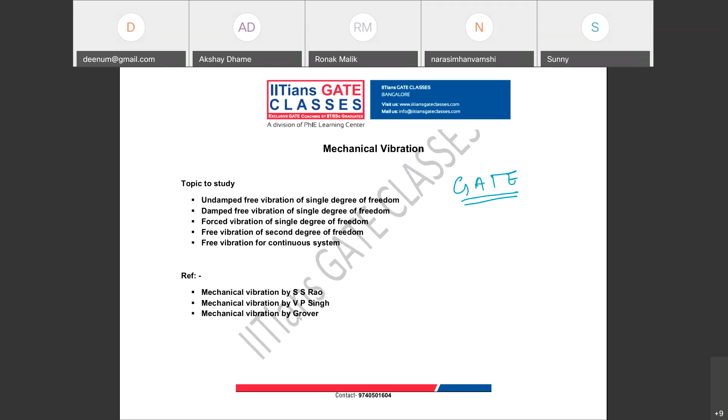So in GATE Aerospace, if you see the syllabus part for mechanical vibration, we have undamped free vibration of single degree of freedom, damped free vibration of single degree of freedom, forced vibration for single degree of freedom, free vibration for second degree of freedom, and free vibration of continuous system. These are the two extra topics we have in GATE AE paper that are not there in GATE ME or GATE XE paper.

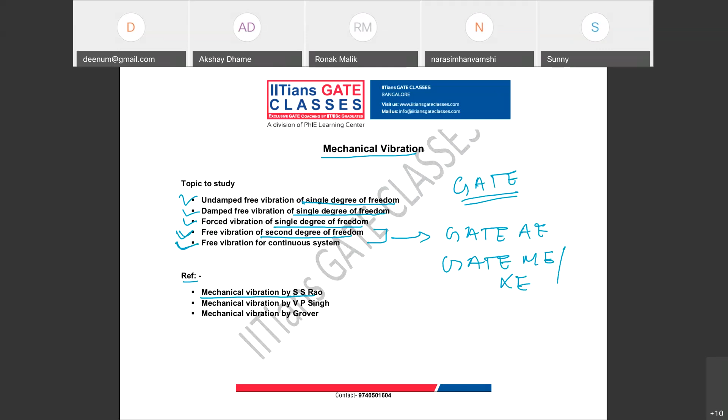So these are the additional topics we have to study. Now, the references we follow for mechanical vibrations: Mechanical Vibration by S.S. Rao, which is one of the most standard books. He is of Indian origin but is a US based author. We also follow Mechanical Vibration by V.P. Singh or Mechanical Vibration by Grover. If you want to have the basic understanding of vibration, you can always refer to these books.

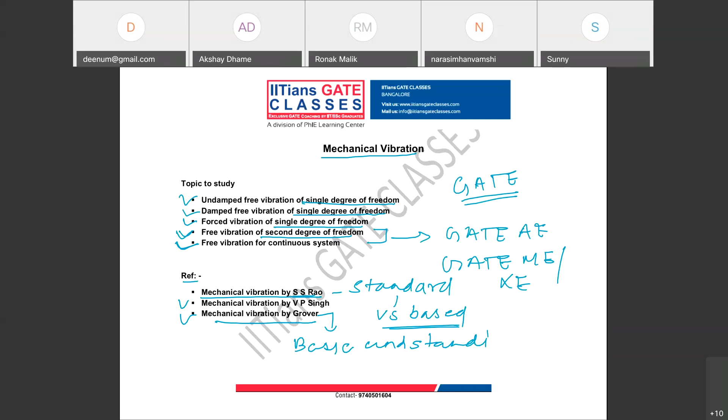Now, what do you guys mean by vibration? Here we will discuss a brief about fundamentals of vibration. So what do you guys mean by vibration? We want all classes to be interactive, so you guys can either respond in the chat box or speak over audio. Classes will be kept very simple, whiteboard teaching or teaching through PPT template.

Now what do you guys mean by vibration? If you have any motion about a mean line, like to and fro motion about this line, what is that? It's a vibratory motion. This is my mean line, and the motion of an object going in this direction, coming back, then going in the opposite direction, coming back to mean position - this to and fro motion is basically your vibration, or vibratory motion.

Now this to and fro motion you can understand by the simple example of swinging of a pendulum. You guys have done some experiment in your physics, right, using one pendulum? So this pendulum is having motion about this midline like this. So this to and fro motion is what?

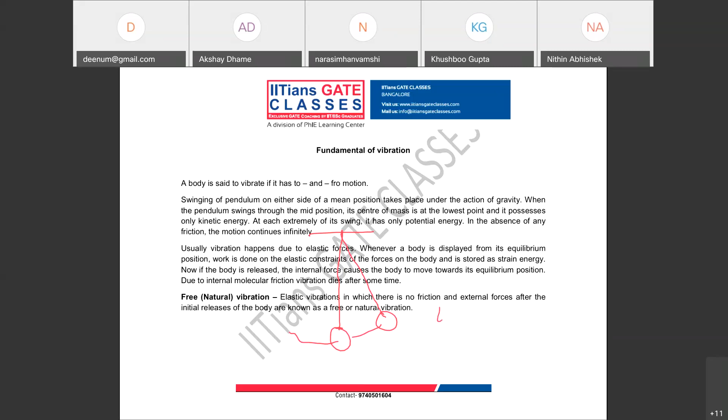Suppose you take the case of a pendulum again - we take a pendulum, and from the mean position, you pull it and then make it free to move. So this pendulum will do to and fro motion. This is known as free vibration. Once you pull it and then release it to have motion, that is free vibration. So, the elastic vibration in which there is no friction or external force after initial release of the body is known as free or natural vibration.

Vibration that occurs naturally is free vibration. Now guys, in free vibration, will your response be a function of time or not? Someone says independent, but no, in free vibration also, your response will be time dependent. Your response will be time dependent because the motion is dynamic. Whenever motion is dynamic, your response will also be time dependent.

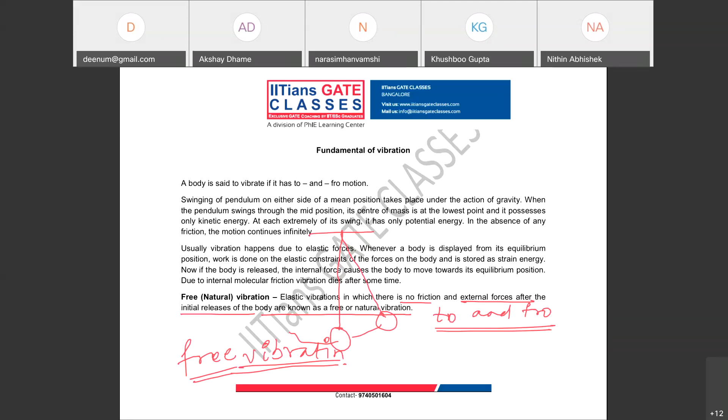Now, what is damped vibration? Anyone? These are the basics of vibration we are discussing. So, free vibration - what is damped vibration?

You guys have seen your door at home. Doors have some dampers, right? So why do we use the damper? To damp the motion, right? When you pull and push, your door needs to get stopped, so the motion has to be died out. Is it clear? In many places, like your landing gear, there also you use damping. Or if you take any other mechanical system, many places damping is required. Why? If you want to stop your vibratory motion, you need to have damping.

Damping can be many types - it can be environmental damping, structural damping, viscous damping, or Coulomb's damping, like damping due to friction. So damped vibration means when the energy of the vibrating system is gradually dissipated by friction or any resistance, the vibration is said to be damped vibration, and the vibration gradually decays until the system rests in its equilibrium position. So clear? This damped free vibration is very important for your GATE exam.

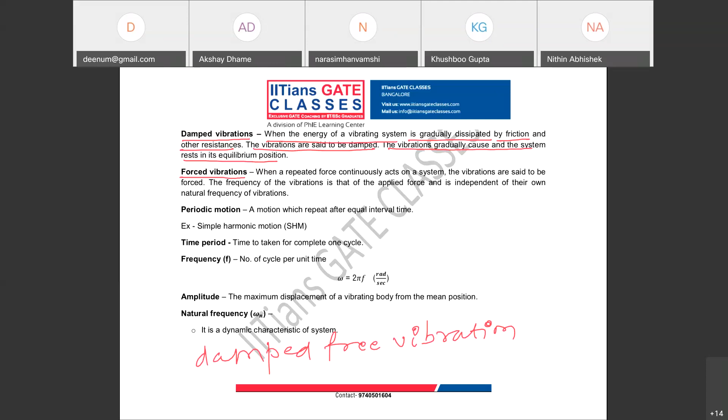So where do you see this kind of forced vibration? You guys are aero guys, right? Can anyone give an example? You guys see your aircraft engine - there are many components attached to it. An engine is one of the mechanical systems which vibrates heavily, right? A lot of vibration happens in the engine, and that vibration will be transmitted to supporting and attached components, so those attached components will undergo forced vibration.

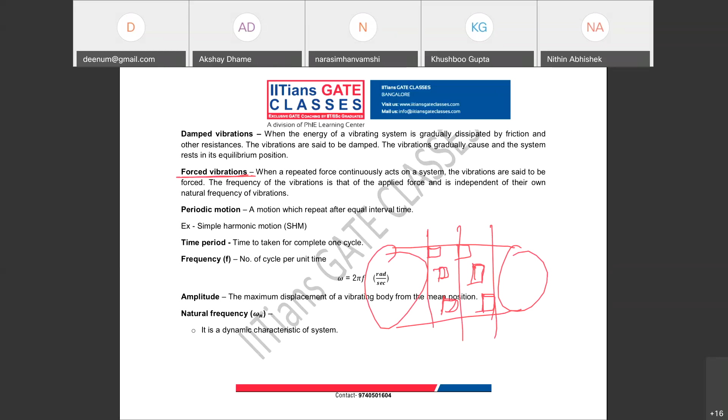Clear? At different sections of your engine, there will be different RPM, so there will be different excitation frequencies. This forced vibration is also very important in practical cases or practical design of components, because in your engine, many components will be attached.

Specifically, have you guys heard about aircraft systems? So all the systems will be attached to your engine, and mostly aircraft systems are tubes - there will be many tubes in aircraft systems. You have fuel system, hydraulic system, air system, many systems, right? So those tubes will be highly prone to undergo forced vibration, or there's the gear system, or any other thing attached to your engine.

And those components have less mass, so mass is less. So what will happen? When you have less mass, your inertia is less, right? Then that component will vibrate easily. Am I correct? So with less excitation also, it will start vibrating.

And then what do we usually try to do? What is resonance? Anyone heard about resonance in vibration? It's when the natural frequency of the system becomes equal to the excitation frequency.

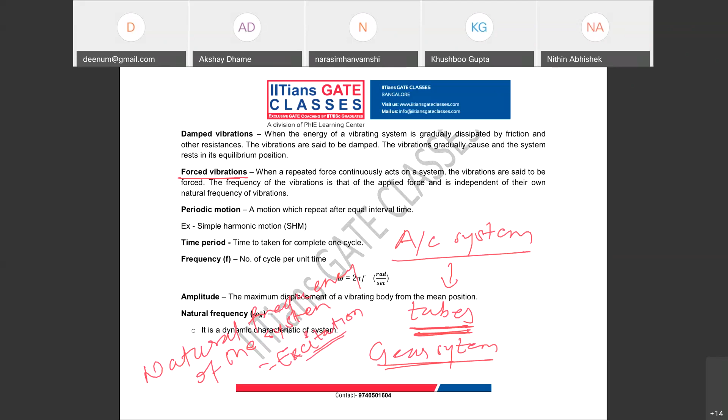Have you guys heard about one bridge? Right? What is the excitation? It's a forced vibration. What is the meaning of excitation? The English meaning, something is exciting. So in forced vibration, we call the frequency as excitation frequency, which is causing the forced vibration.

Now guys, next thing, in basics, what we will study is forced vibration. When we go to the forced vibration part, what is periodic motion? Simple term, you guys know what is periodic motion? A motion which repeats after equal intervals of time is periodic motion. An example is simple harmonic motion. What is the time period, anyone?

Time taken to complete one cycle of vibration is time period. What is the frequency, guys? Which is very important. The number per second, sir. Yeah, number of cycles per unit time is your frequency.

Now guys, what is this F and omega? See, omega is known as natural frequency, and this is also natural frequency. This omega n is natural frequency. So what is the difference between omega n and Fn? We know always omega is 2 pi into F. So there is only a difference of unit. If your natural frequency is given in terms of omega, then the unit will be radian per second. If it is given as Fn, then the unit will be hertz.

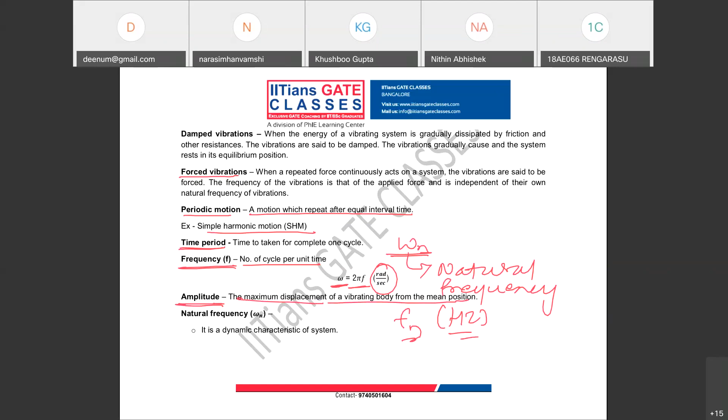Now the next thing I was discussing is natural frequency. So what is the dynamic characteristic of a system? Anyone? Natural frequency is known as... there is no theoretical difference as such. It is like you denote it, the number of cycles per unit time is Fn, in hertz. And if you want to write in terms of omega, it is 2 pi into F.

Now natural frequency, basically, is known as the dynamic characteristic of the system. Any system you design, you need to know the natural frequency. Anyone, why do we want to know natural frequency for any system which we design? Any reason to find natural frequency for a designed system? When you design a system, you need to know it to avoid resonance.

To avoid resonance. That means that system will be attached to some component which may provide something, so that there will be no resonance. We want to avoid resonance. If resonance happens, failure will happen.

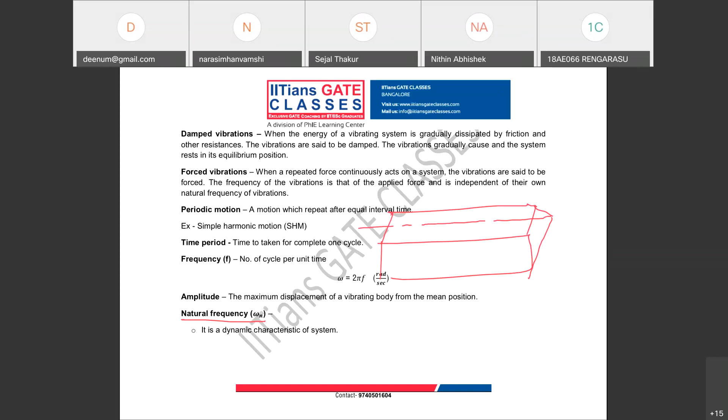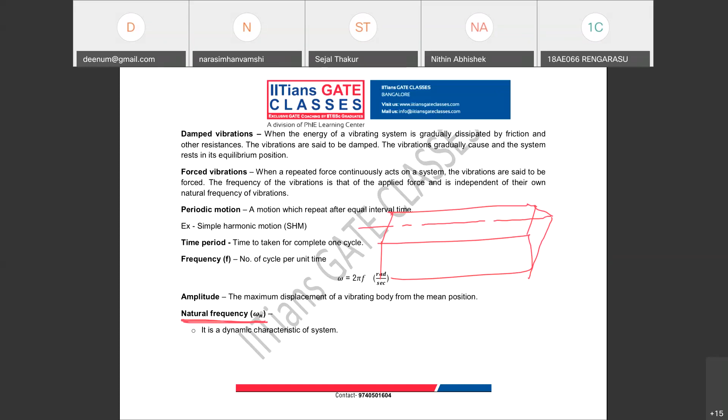So natural frequency is a very important thing everywhere. Wherever you design a system, first thing in dynamics, what we find is the natural frequency of the system. So it is also known as the dynamic characteristic of the system.

And your natural frequency is independent of load. Whatever load you apply, your natural frequency will not change. Once you decide or design a system, your natural frequency becomes fixed. So it is independent of load. Why do we multiply by 2 pi f? This is omega n, and it is 2 pi f. So 2 pi is more related with a cycle - it is something related with a complete cycle of motion.

Now, already we have discussed that this is the frequency of free vibration - natural frequency is the frequency of free vibration. And resonance we have already talked about. So what is resonance? When the frequency of the system becomes equal to the natural frequency of the system, resonance happens and the amplitude of vibration becomes excessive, so your system will get collapsed.

Now damping - already we have discussed damped vibration. So damping is the resistance to the motion of a vibrating system, that is damping.

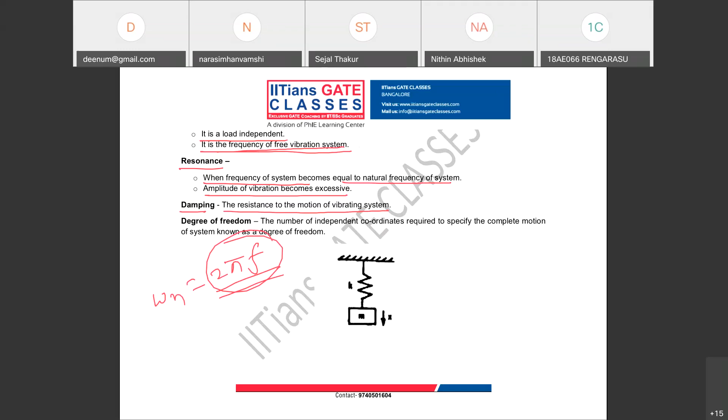Now, the next thing after this is degree of freedom. So what is the degree of freedom, anyone? What is the degree of freedom? Ability to move. It is the ability to move. Rotation around the independent axis. The rotation around the independent axis is degrees of freedom.

Yeah, so degrees of freedom is basically the number of independent displacements required to specify the complete motion of the system - the number of independent... one moment guys, yeah.

So what is this degree of freedom? The number of independent coordinates required to specify complete motion of the system is the degree of freedom.

So what I mean, see, this is a spring mass system, a single spring mass system. Now if you want to specify this complete motion, how many independent displacements are required? One. So here the degrees of freedom will be 1 in this case.

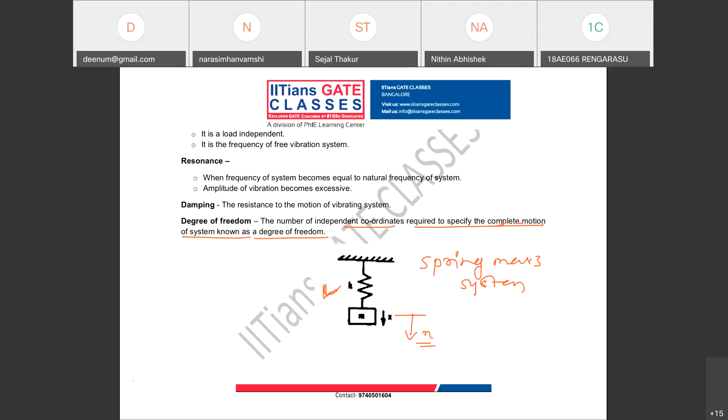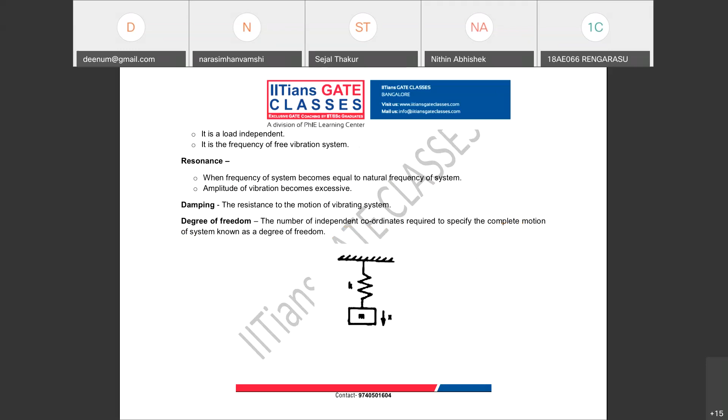Now next, once you have a multi degrees of freedom system, what is the continuous system? There are questions in GATE on this. What is the continuous system, guys? If the number of degrees of freedom is infinite, the system is said to be a continuous system.

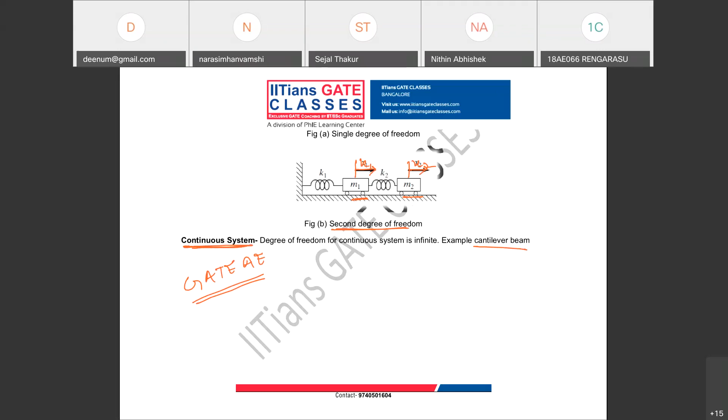What is the example? Cantilever beam. For a beam, the number of degrees of freedom is infinite. Why infinite? You can see there are many sections, many nodes, infinite number of small masses. So there will be infinite degrees of freedom associated to each distributed mass. So this is the continuous system.

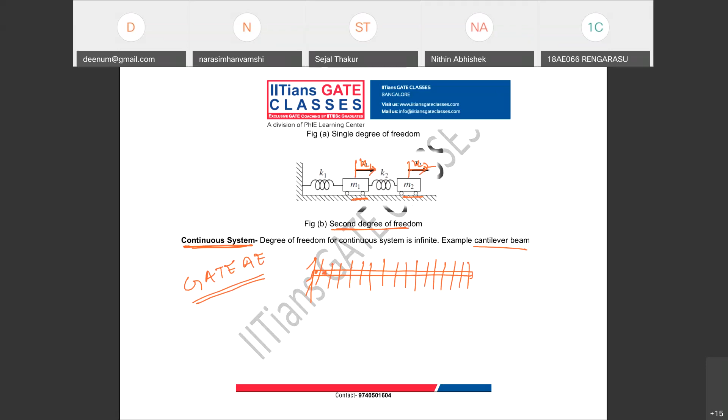Now next, the thing which we need to discuss is the response of undamped free vibration of a single degree of freedom system. There are several questions in GATE Aerospace from this undamped free vibration of single degree of freedom.

So guys, to understand this response of single degree of freedom system, what we need to know is something called the free body diagram, of a dynamic system. So have you guys heard about Newton's method?

So what Newton's method says is, if a mass is displaced from its equilibrium and released to vibrate, what will happen? You will see there will be one force opposite to the motion, which is the inertia force. Then your spring will also oppose this motion, so there is a spring force.

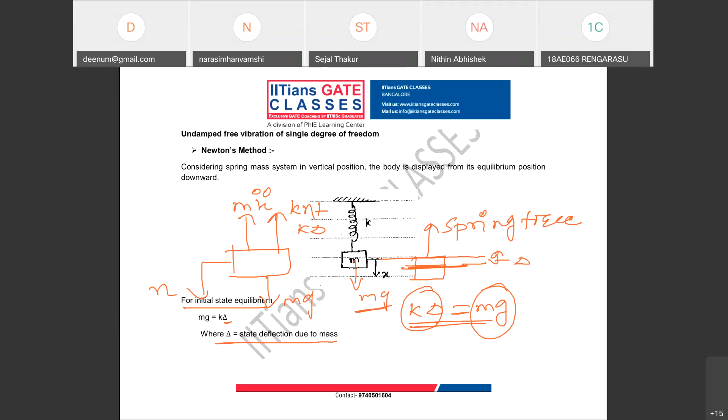If you draw the free body of this mass which is in motion, m x double dot is your inertia force, kx is your spring force. If you write mg, then you have to write additional kx plus k delta. So usually in dynamic equilibrium, we do not consider this mass component, the force due to mass, because by default it will be in equilibrium from static: your mg and k delta will cancel.

So whenever you use Newton's method, we will talk only about inertia force and spring force, and this is for free vibration. If your vibration is damped, there will be one more force, the damping force. And if your vibration is forced vibration, then there will be additional external force.

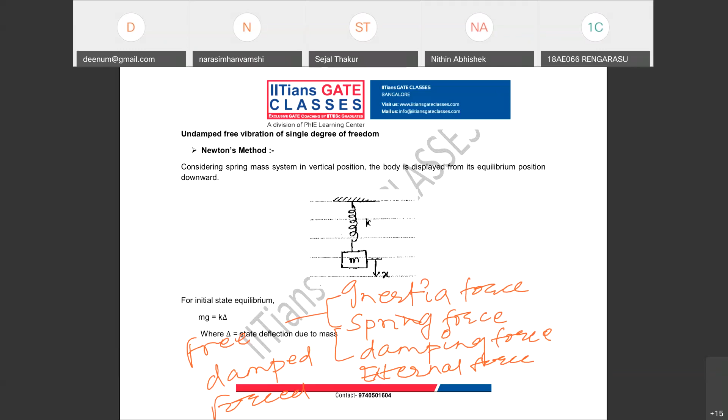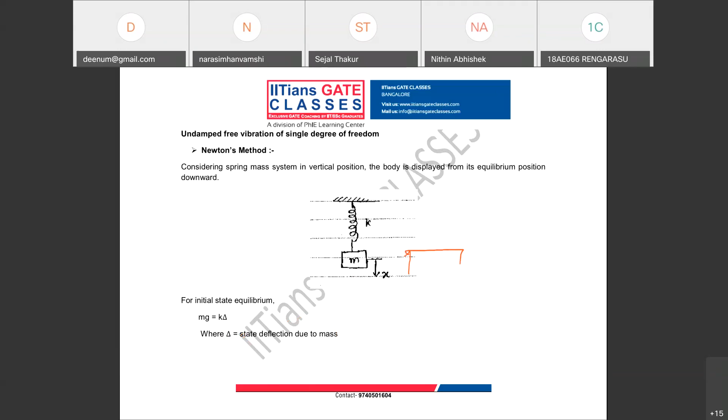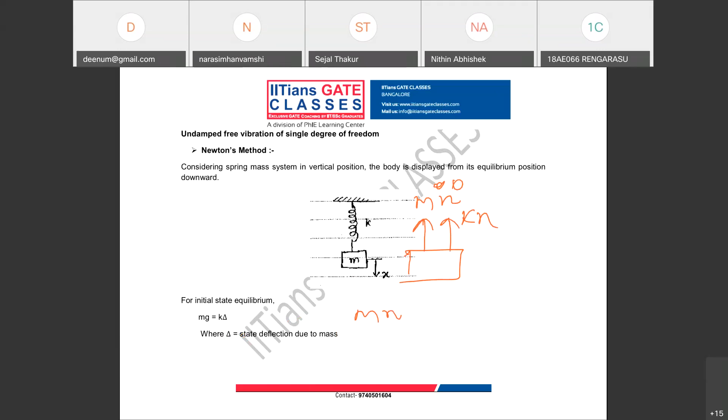Okay, so this is what. Now, what is the equation of motion when we draw the free body? In this case, there are two forces, mx double dot and kx. So what is the equation of motion? It is mx double dot plus kx equal to 0. This is the governing differential equation for a single degree of freedom system, for a spring mass system.

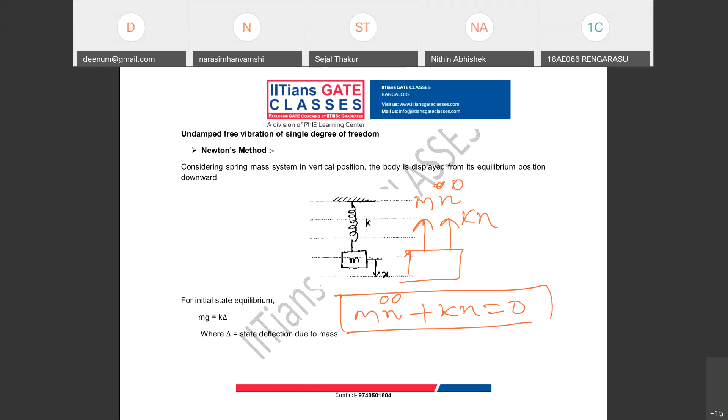So now, once you know this equation, it's a differential equation. What is mx double dot? It is the inertia force. X double dot is your acceleration. Mass into acceleration is inertia force, right?

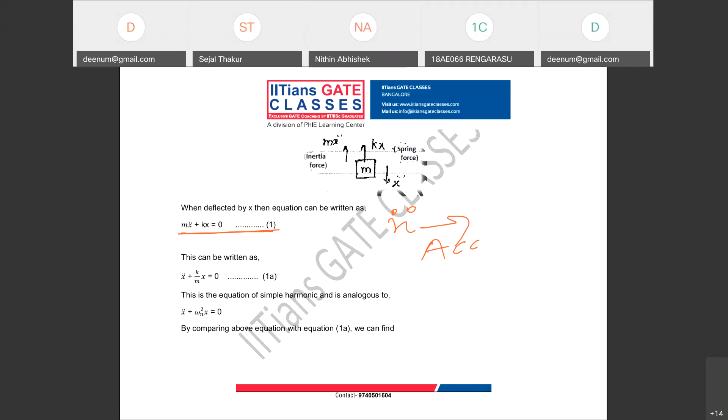Okay, fine, so we can find the solution of this equation. Now you can see this x double dot plus k by m into x equal to 0. What is this equation? This equation is analogous to your equation of simple harmonic motion, because from our 11th or 12th physics, the equation of motion for simple harmonic motion is x double dot plus omega n square x equal to 0. So what is omega n here? It is the natural frequency of this system.

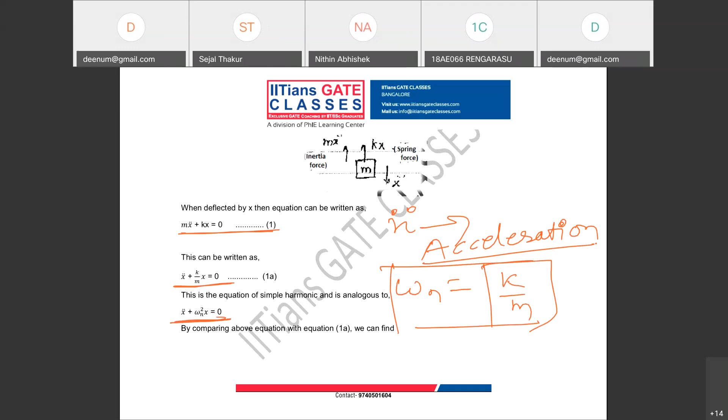What is the solution for this equation? It can be written in this form: x equal to capital X sine omega n t plus phi. Or it can be written as A cos omega n t plus B sine omega n t. Now tell me, what is A and B here? These are constants, and these constants can be found from the initial boundary conditions.

Okay, what is the initial condition you can have here? At t equal to 0, what is your displacement? What is your velocity? These are your initial conditions.

Okay, in avionics you will have similar concepts, not spring. Now in control also, you will have a lot of vibration kind of equations, similar equations.

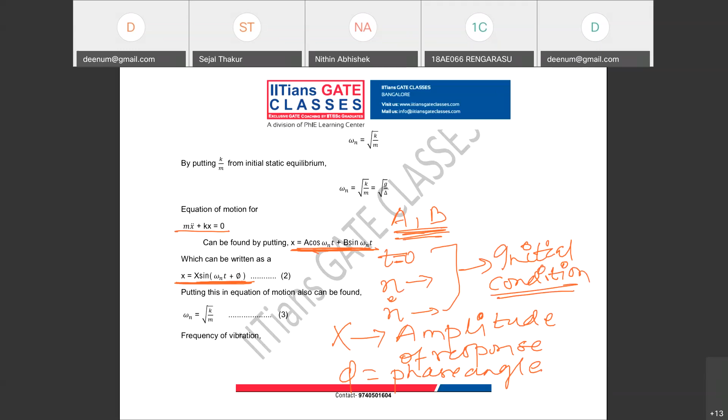Before that, one more thing we can write here is: your natural frequency is under root k by m, right? Now we already know from static equilibrium, mg is k times delta. So you can write k by m as g by delta. So you can write your natural frequency either as under root k by m or under root g by delta static. Is it clear? In both forms we can write natural frequency. Or if in your question they just give delta static, you can still find the natural frequency of the system.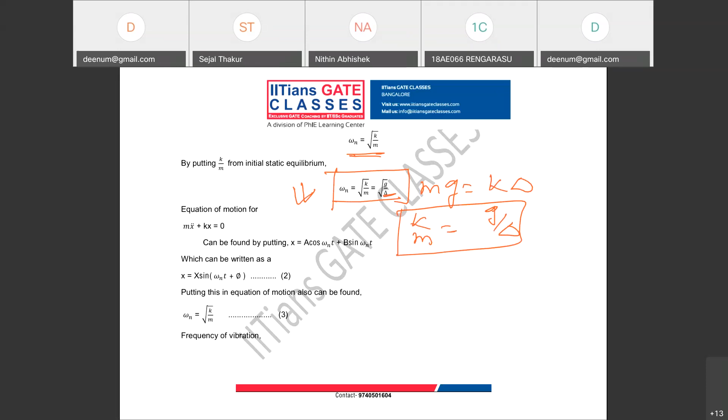Now, next is: once you know omega n, what is Fn? It is omega n by 2 pi. So we can write natural frequency in terms of hertz.

Now from initial conditions, as I told, suppose at t equal to 0, my x is x naught, the initial displacement, and my velocity is v naught. Then what will be my capital X and this unknown phi? So how can we write this? Substitute at t equal to 0, x equal to x naught into the equation. What will you get? You'll get x naught equal to capital X sine phi. When you substitute at t equal to 0 for velocity equal to v naught, first we find displacement, so how can you find velocity?

How can you find velocity? You differentiate this displacement equation, you will find velocity, right? So what will be your velocity? It will be capital X into omega n cos omega n t plus phi. Now at t equal to 0,

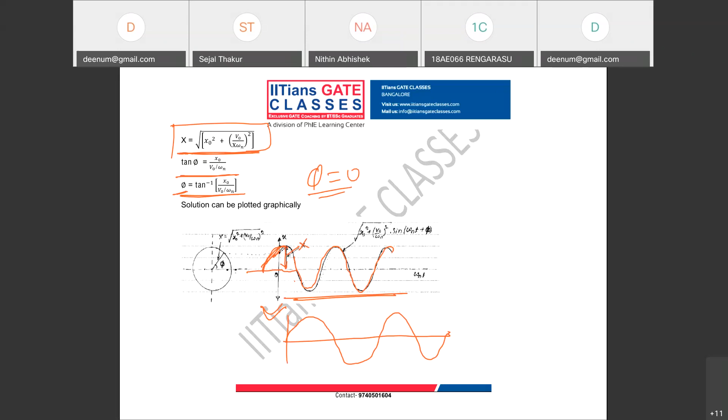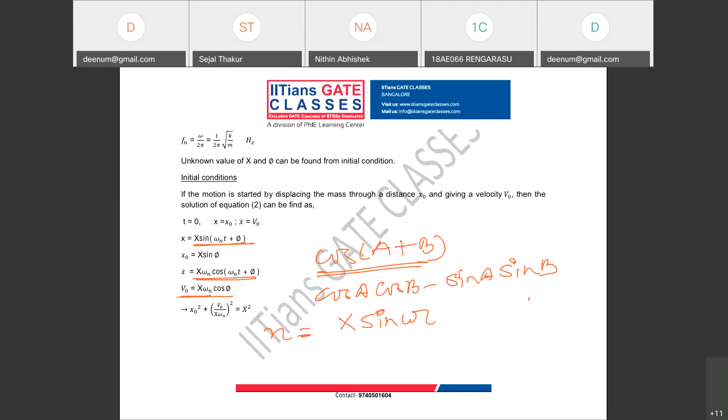You can see here, this is my equation. If phi is 0, so your response equation is what? My response equation is x equal to capital X sine omega t. So what is the curve for sine omega t? Everyone knows it is like this. It starts from origin, it goes like that.

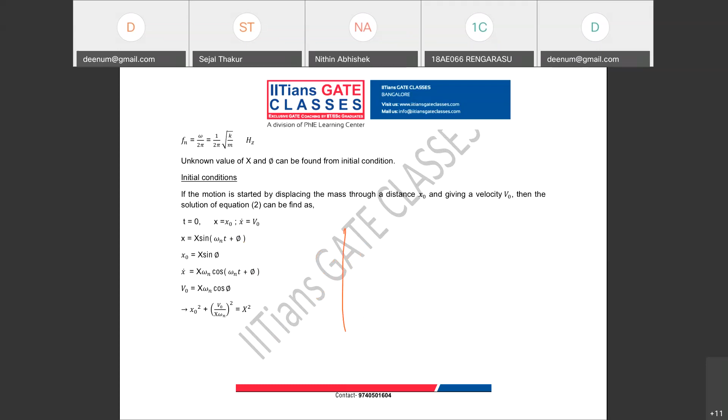Okay, when phi is 90 degrees, anyone? When phi is 90 degrees, what will be the response, guys? Anyone? What will be the response if phi is 90 degrees? Phase angle is 90 degrees. And when will the phase angle be 90 degrees, anyone? Anyone tell me? What is your phi?

Phi is tan inverse. It is tan inverse what? X naught omega n by V naught. Now tell me, guys, when will phi be 90 degrees? Anyone? When phi is 90 degrees, so this is what the response. If phi is 90 degrees, so my response equation will be what? It will be capital X cos omega n t. So when will phi be 90 degrees, anyone?

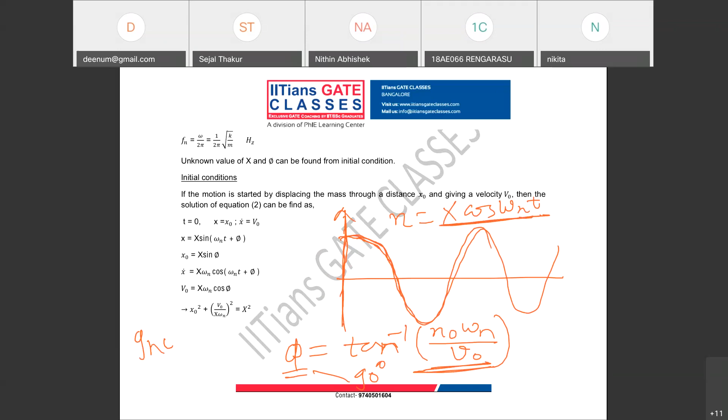This is what your response equation looks like when you have phase angle 90 degrees, and this is how your response curve looks. Now tell me, for what initial condition will phi be 90 degree from this equation? Anyone?

Quickly, anyone tell me, your equation is in front, when will this be 90 degrees? Phi is 90 degrees if it is tan inverse infinity, and it will be tan inverse infinity if v is 0. Clear? So if your initial velocity is 0, then your phase angle will be 90 degrees and your response will be x cos omega n t, and this is a GATE question.

This is from where the GATE question is there, one of the questions. I will give you this question. You see question number 2, guys. It's visible, right?

Is it clear why this phase angle is 90 degrees from here? When it is 90 degrees, if your initial velocity is 0, then your phase angle will be 90 degrees and your response will be cosine. So you can see if you substitute t equal to 0 in this equation. Tell me anyone, if you substitute t equal to 0 in this equation, what will you get?

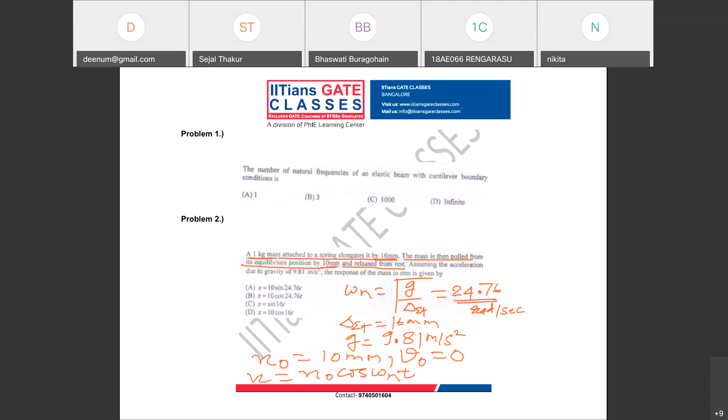Here you can see this equation, and your capital X is X naught. So tell me, what is the answer, guys, here now? What is the answer?

Yes, option B is the answer. Clear? So these are easy questions based on your proper concept learning. Was this question tough? Yes or no?

So this is how we discuss concepts. Every basic is covered and then we go one by one into related questions. Is this method fine? You guys understood? Any doubt here in this question? No, sir. Anyone - Nitin, Abhishek, Shreya, Manikandan, Ishwar, Abhiram - anyway you are writing.

Anyone has any concern or question here? Tirth? Okay, you didn't get the calculation part. What is your natural frequency formula in terms of delta static? What is the delta static here? If you read this question - see a mass, this mass can elongate this spring by how much? Delta static, right?

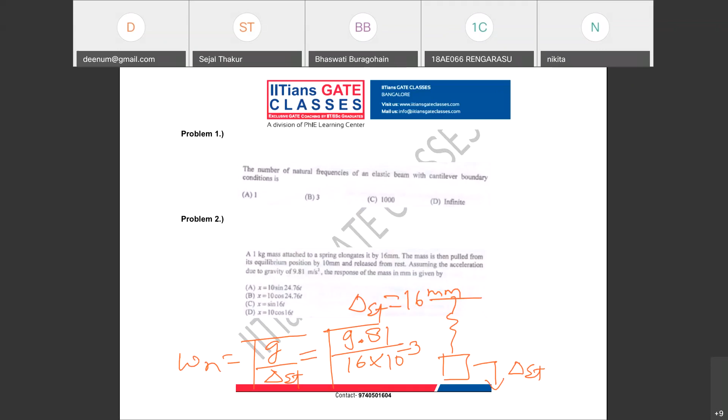Okay, now look here, one more question. The first question - the number of natural frequencies of an elastic beam with cantilever boundary condition. What is the answer, guys?

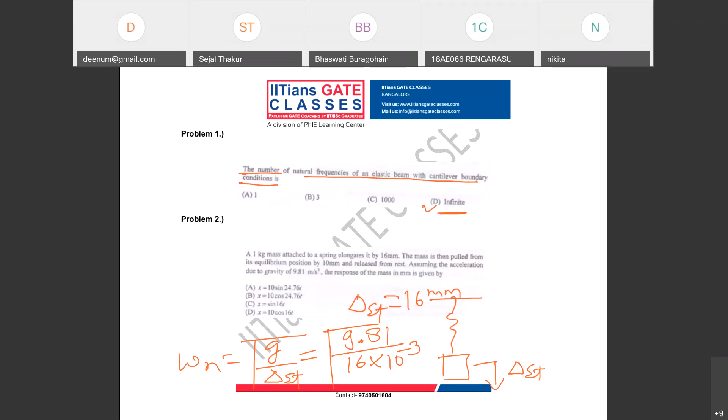Infinite, sir. D. Yes, it is infinite, right? Because your cantilever beam is a continuous system, and the number of degrees of freedom will be infinite. Okay, is it clear to everyone?

Yes, sir. So let's do one more question. The next question is also from the previous concept. What is given - x double dot plus 3x equal to 0, and your initial conditions are given.

X at t equal to 0 is 1, and x dot at t equal to 0 is 0. So that means velocity is 0. Your initial velocity is 0, and this is your initial displacement.

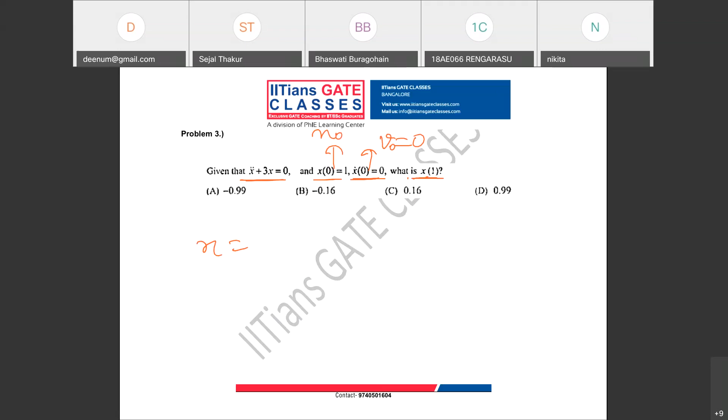Now they ask at t equal to 1, what will be your response? So what is the first thing we have to find? We have to find the response equation, which will be x naught cos omega n t.

What is our omega n, guys, here? It is root of 3. All right, and what is your x naught? It is 1. So we can find at t equal to 1 what is your equation, what is your response. It is 1 into cos.

Guys, one more thing - make sure you convert. When you find the angle, this is in radian. So you either keep your calc in radian or convert to degree. Tell me the answer, guys. 1 cos root of 3. 1 into cos root of 3. How much is the value, the value of cos root of 3?

I think, Abhiram, you're facing an issue due to internet. Minus 0.16, sir. Minus 0.16, exactly. Yeah, so that is the correct answer. So what is the answer?

B is the answer. Now, guys, why did I write this equation directly? I didn't use the generalized equation, right? What is that generalized equation? X sine omega t plus phi, right? This is my generalized equation, right?

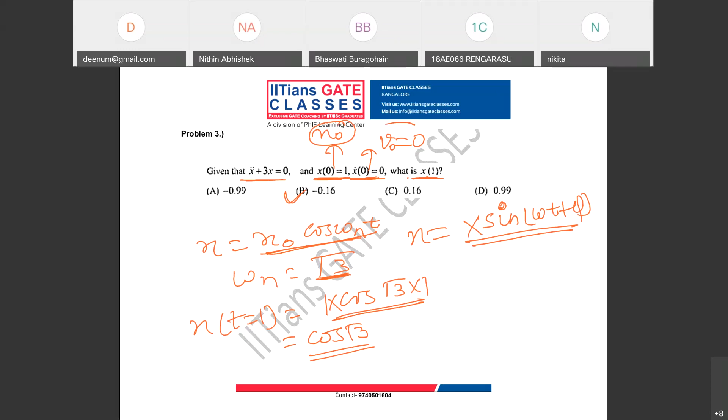Why didn't I use it? I wrote this because I already knew from the initial condition - when initial displacement is non-zero and velocity is 0, my response equation will be this. Is this point clear? And is this question clear? Everyone got the answer - cos root of 3?

Yes or no? Yes, sir. Okay, so how do you guys want me to explain a few more things, or is this fine? Because this is just a demo - we are not in a regular class.

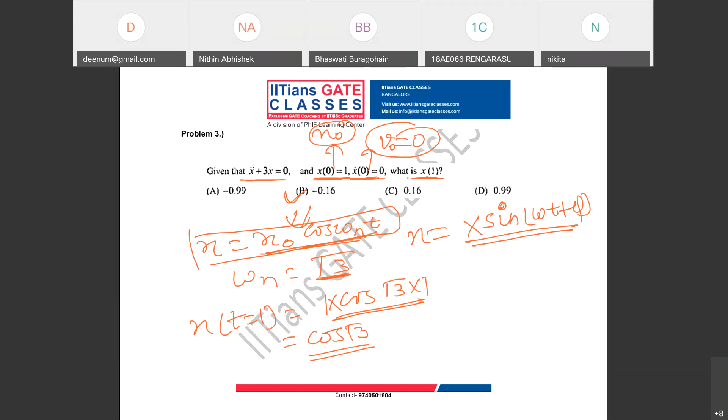Are you guys getting interested while solving questions? So let's do one more question, which is again a good question. Question number 4, based on a similar concept.

Read the question, guys. What is given? One end of a linear spring is attached to a fixed support and a mass of 2 kg hangs from it. At the other end, a force of 4 Newton causes a displacement of 0.02 meter. The mass is pulled down a distance of 0.04 meter from its static equilibrium position and released with zero velocity.

You all can see this question. So again, guys, the initial force of 4 Newton causes what displacement? 0.02 meter. Okay, so guys, what is your natural frequency?

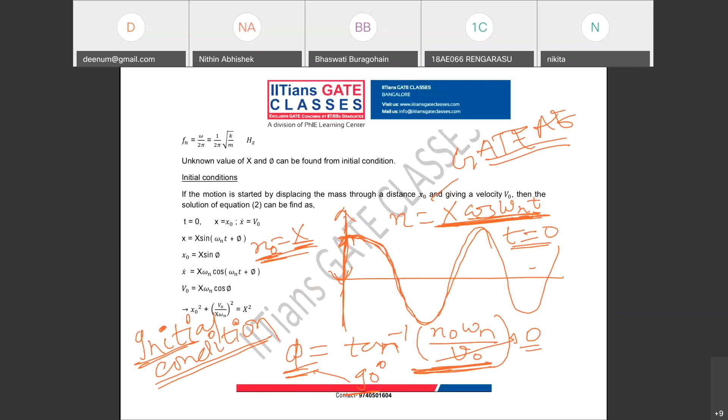So here both my velocity and my initial displacement are non-zero. So this is what my x is - it is under root of x naught square plus v naught by omega, whole square. And my response is sine - I can multiply it by sine omega n t plus phi.

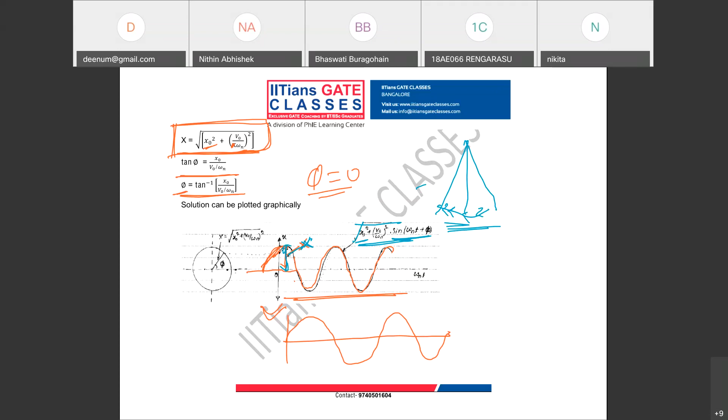So did everyone understand the last question where they asked to find the velocity? Sir, is it answer B? Yes, B is the answer. 0.346 is the answer.

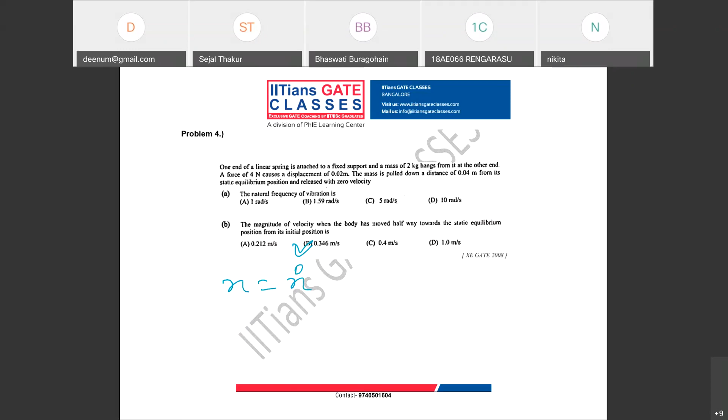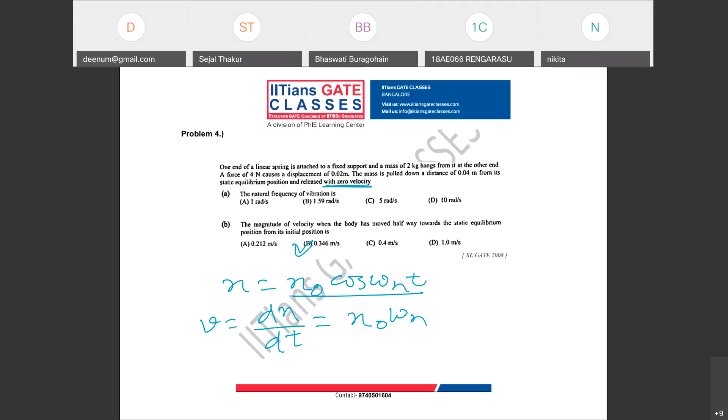How did the velocity equation come? What is the displacement equation? It is x equal to x naught cos omega n t, when your initial velocity is 0. Now, what is the velocity? It is dx by dt. So can you differentiate this equation? What we'll get is x naught omega n, and minus sine omega n t. So what we got is minus x naught omega n sine omega n t. Clear? Is this clear now? Yeah, fine.